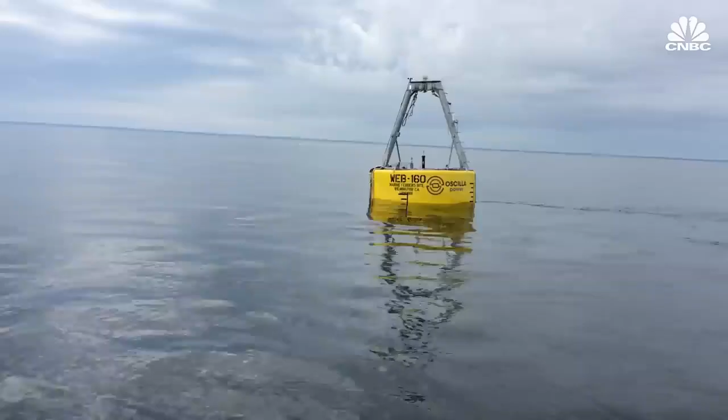Now, though, an influx of federal funding is helping many U.S. companies gear up to test their latest wave energy converters, as the nation's first full-scale, grid-connected test facility for these technologies, called PacWave, is set to come online over the next few years. PacWave really represents for us an opportunity to address one of the most critical barriers to enabling wave energy, and that's getting devices into the open ocean.

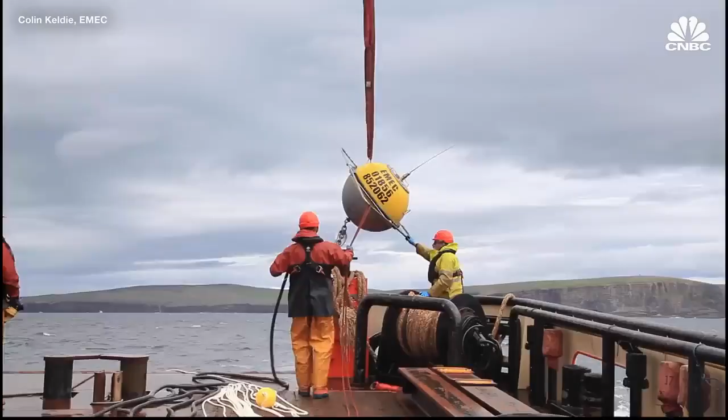That will help the U.S. catch up with its European counterparts, who've been testing wave energy devices off the coast of Scotland since the early 2000s. But while many prototypes have been developed, it's still unclear what technology will prove viable for grid-scale electricity production. There are just this vast array of approaches to turning oscillatory motion into ultimately electrical power.

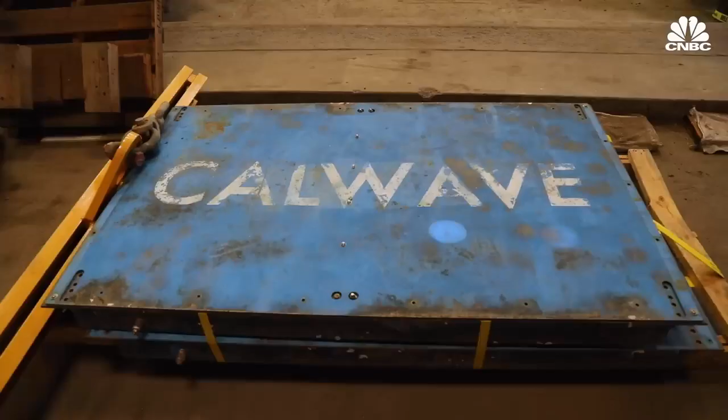We spoke with a number of companies pursuing different technologies and learned how this emergent energy source could help us transition to an all-renewable world, if we can get it to work at scale.

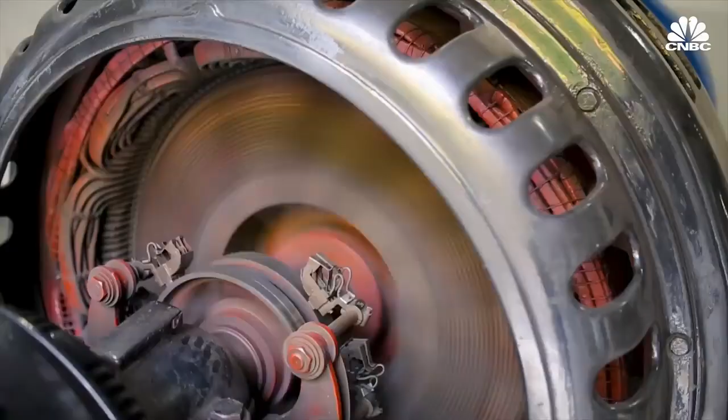Besides the fact that the ocean is a rough environment, the very nature of waves themselves means harnessing their energy is much less straightforward than, say, wind or hydropower. Winds and currents, they go in one direction. It's very easy to spin a turbine or a windmill when you've got linear movement. The waves really aren't linear, they're oscillating.

And so what we have to be able to do is turn this oscillatory energy into some sort of capturable form. There are a number of different ways to do this. But generally speaking, devices work by harnessing the up and down, back and forth, or rotational motion of the waves to drive a generator to create electricity.

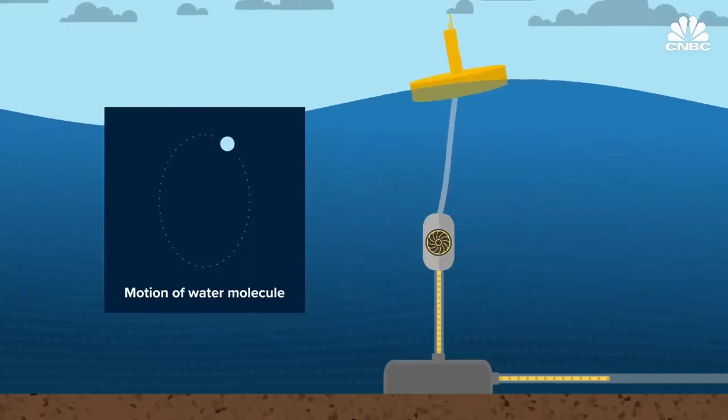Some companies are now attempting to harness energy from multiple different modes of motion. And what we don't really know is which of those is best in a real-world full-scale system. One technology might work really well for large, slow, open ocean swells. Another technology might work really well for choppy or wind wave kinds of energy.

If wave energy proves to be scalable, it has the potential to be an excellent complement to wind and solar, since it can produce energy 24/7 in all weather conditions. And while wind and solar production peak in the spring and summer respectively, waves are more powerful and consistent in the winter. But the infrastructure required to scale up any of these systems and connect them to the power grid is complex and expensive.

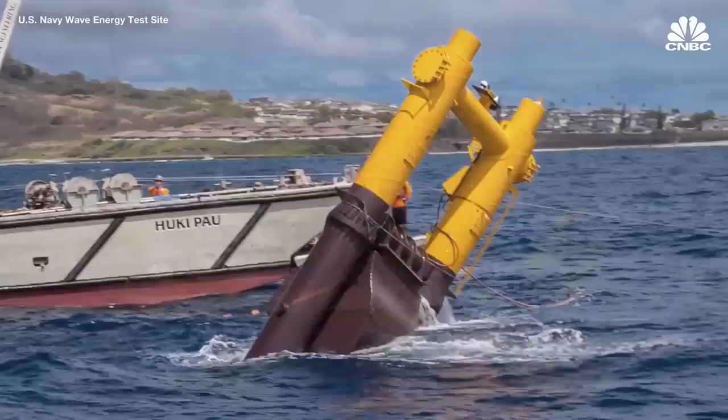So if you're building, let's say, a wave energy plant offshore, you're going to have to build your mooring and anchoring systems out offshore. Cables will then go from your wave energy converter down to a subsea cable where you probably have a sort of a junction box where you might plug 10, 20, 50 devices in with one larger export cable that will then run along the seafloor.

But when it gets close to shore, you'll have to drill it under the seabed and under the surf zone because that's a very active environment, and then pop up in a location on shore.

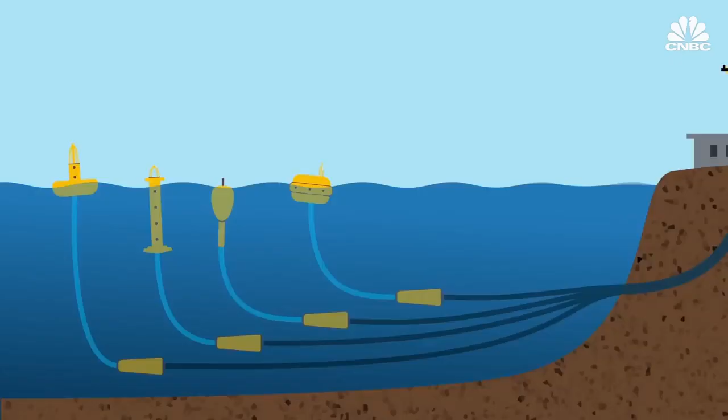PacWave, the Department of Energy-funded wave energy test site off the Oregon coast, is building this infrastructure now. It's a collaborative effort between the DOE, Oregon State University, the National Renewable Energy Lab, the European Marine Energy Center, and a host of other marine energy experts. The facility is fully pre-permitted, so companies can trial their prototypes without concern about regulatory delays.

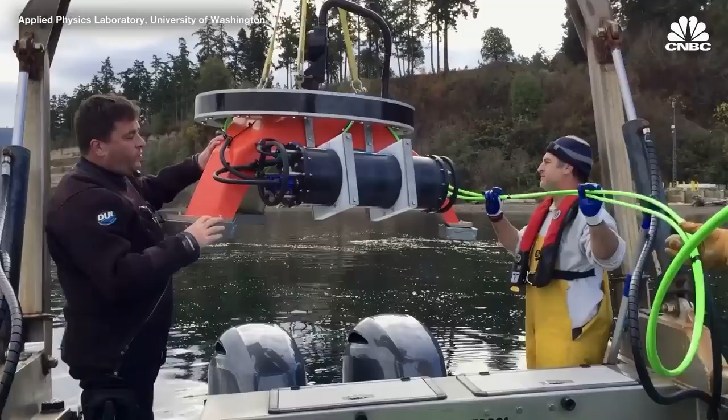The Department of Energy has funded 8 different companies to start deploying at PacWave beginning in 2024, and we can't wait to have them on site. This is really a seismic shift in the wave energy community.

In the U.S., the DOE has been funding marine energy for about a decade, a category which not only includes wave power, but also power generated from currents, tides, and temperature changes. During that period of time, we've spent probably around $500 million or so on marine energy. But this year, we actually saw a record amount for our office, specifically for marine energy, $112 million in 2022. And this also includes an additional $110 million from the Bipartisan Infrastructure Law.

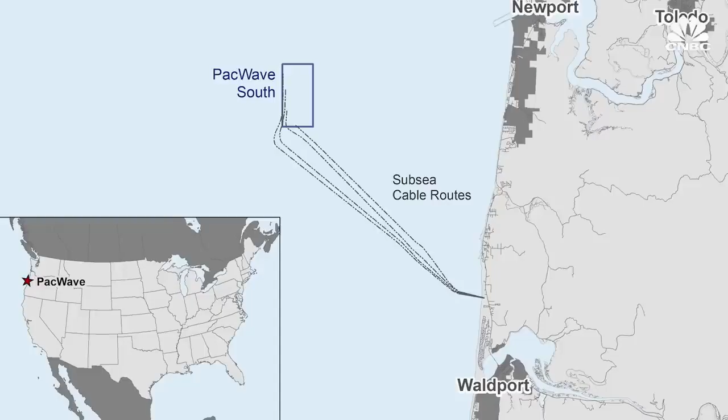And at the beginning of this year, the DOE announced $25 million in funding for 8 wave energy projects, which will comprise the first round of technologies to be tested at the PacWave facility. Of the 8 projects, Bay Area-based CalWave received the largest amount, $7.5 million.

A small-scale version of CalWave's device recently returned after a successful 10-month deployment off the coast of San Diego. Yeah, the device we're testing at PacWave will be a larger version of this, so nearly double the size and 10 times the amount of power. And so this unit specifically was able to power about 30 households. The X800, our megawatt class system, produces enough power to power about 3,000 households.

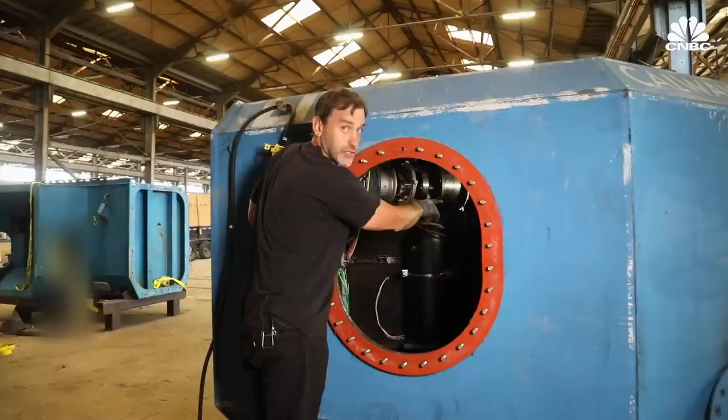So our target is 20-year deployments at sea, and I think that's very achievable with maintenance interventions about every 4 to 5 years. CalWave's tech is classified as a submerged pressure differential device. It operates completely below the surface of the water, and as waves rise and fall, surge forward and backward, and the water moves in a circular motion, the device moves too. Dampers inside the device slow down that motion and convert it into torque, which drives a generator to produce electricity.

Lehmann likens it to how electric cars recharge when braking. As the electric car goes downhill and you put on the brake, it would produce power. And so the waves move the system up and down, and every time it moves down, we can generate power. That oscillating motion we can turn into electricity, just like a wind turbine.

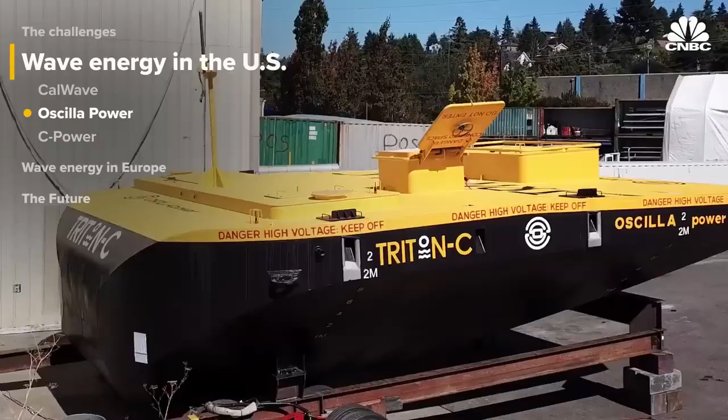Seattle-based Oscilla Power was awarded $1.8 million from the DOE, and is getting ready to deploy its wave energy converter off the coast of Hawaii at the U.S. Navy Wave Energy Test Site. While this facility is smaller than the planned PacWave facility, it's currently the nation's only grid-connected site for tech like this. The system that we're deploying in Hawaii is what we call the Triton-C. This is about a third of the size of our flagship product. It's designed to be 100 kilowatt rated, and it's designed for islands and small communities.

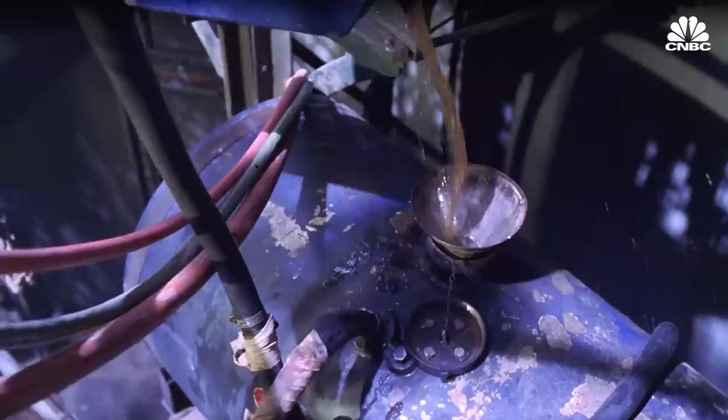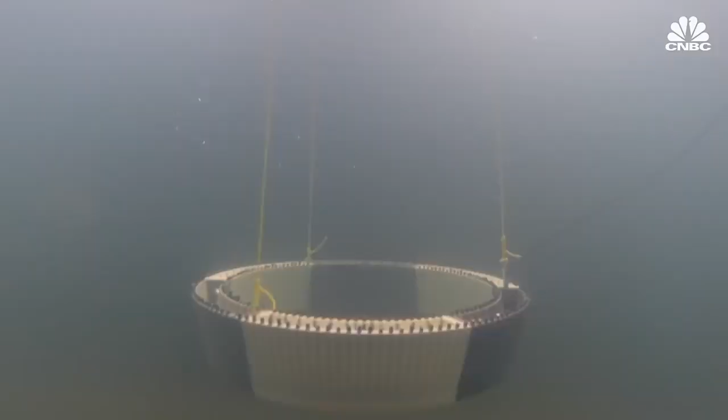Nair and many others are excited by wave energy's potential to generate electricity for remote regions, which rely on expensive and polluting diesel imports to meet their energy needs. Oscilla Power uses a technology known as a two-body point absorber. Part of the Triton-C floats on the surface and moves with the waves in all directions, up and down, side to side, and rotationally. Underneath the float hangs a large ring-shaped structure, which stays relatively steady, thus generating force on the lines that connect it to the float. That force is then used to rotate a gearbox to drive a generator.

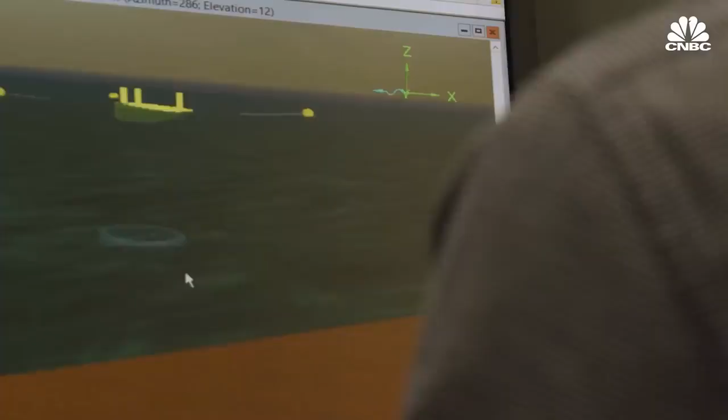So under very weak waves, we get a lot of pitch and roll motion in our system. At very strong waves, we get a lot of surge motion, and in the most prevalent wave climate, we get a lot of heave motion. That's up and down motion. So across all of these, the system certainly moves enough for us to be able to capture energy efficiently across a wide range of climate. Oscilla Power plans to deploy a larger megawatt-scale device in India in 2024, and then move on to testing at PacWave.

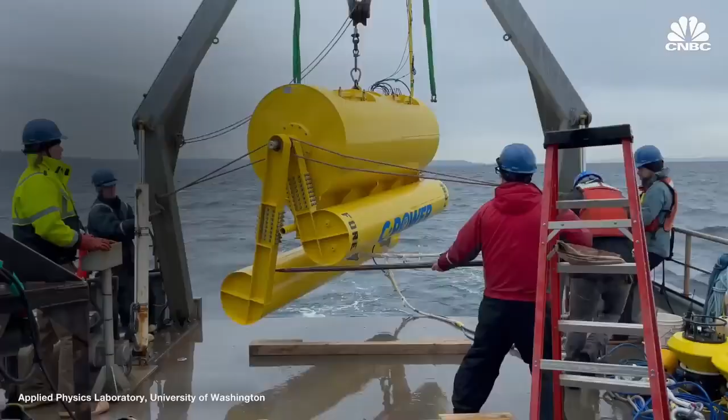The DOE also awarded Charlottesville, Virginia-based company C-Power over $4 million to develop and test its grid-scale wave energy converter, the Stingray, at PacWave. But before that testing takes place, the company is focused on commercializing its smaller-scale system, the Sea-Ray, designed for lower-power applications. Think about sensors in the ocean, research, mid-ocean data gathering, maybe it's monitoring or inspection.

The next step, Lesemann says, is powering ocean robotics and operating equipment. And then you think about diesel genset replacement for island power. Then we start to work our way towards charging networks for autonomous surface vessels, and then eventually to terrestrial to grid applications. The Sea-Ray consists of two floats and a central body, the nacelle, which contains the drivetrain. As waves pass by, the floats bob up and down, rotating about the nacelle and turning their own respective gearboxes, which power the electric generators.

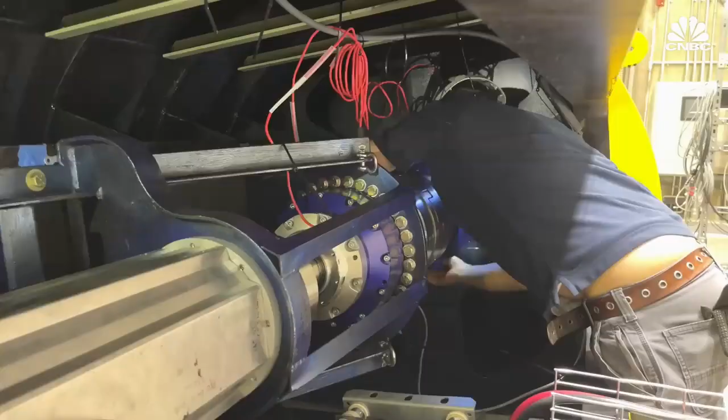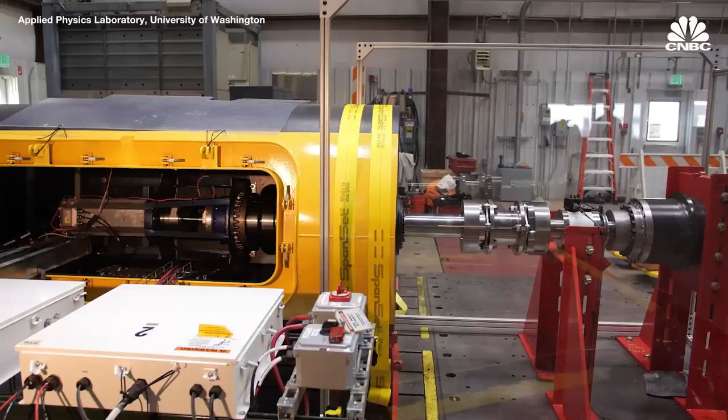We have a Sea-Ray that will be deployed off the coast of Hawaii this fall, and that's a 2 kilowatt version. We've got a number of customers that are involved with us. Saab is one, who's one of the global leaders from a subsea robotics perspective. Biosonics is another with a static data gathering system. After these initial applications, C-Power will work on scaling up its Sea-Ray so that it's compatible with satellite communications and deep water deployments, before building a 200 kilowatt Stingray to test at PacWave.

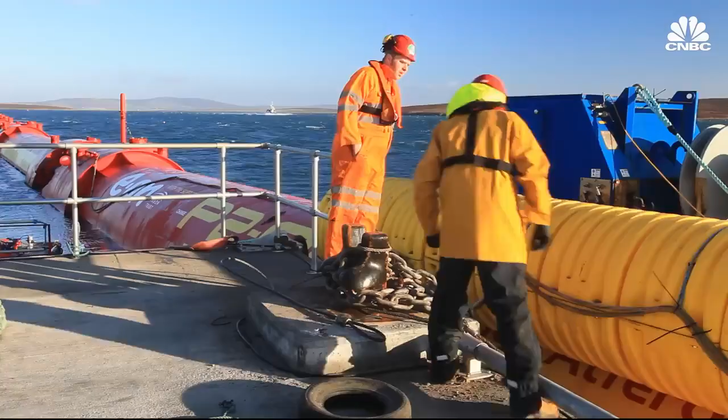The European Marine Energy Center, or EMEC, was the first test site in the world for wave and tidal technologies when it opened in 2003. We've had something like 35 different devices in the water from 22 different companies from, I think, 11 different countries. Some of those include Finnish company Wello Oy, which produced power for the grid in Scotland during its 2 deployments at EMEC, and has subsequently been deployed in Spain, and Scottish company Pelamis, which became the first offshore wave energy converter to produce power for a national grid in 2004. It was also the first to be purchased by a utility company, though financial troubles ultimately forced the company to cease operations.

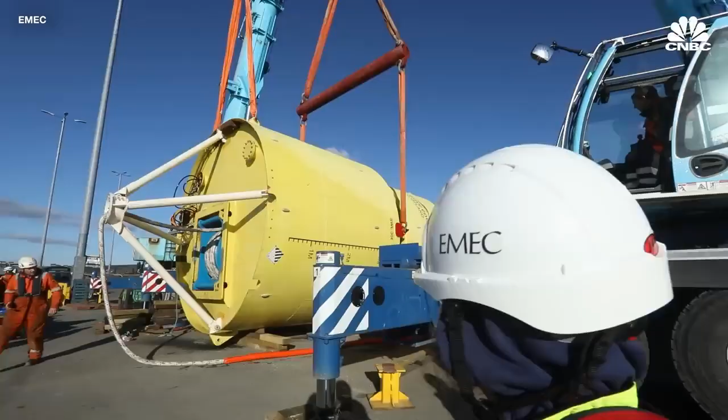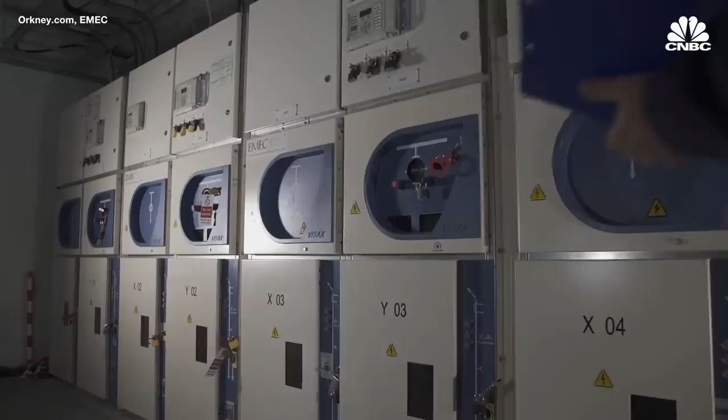While EMEC has seen its share of successes and disappointments, no company has yet commercialized a grid-scale wave energy converter, so Kermode is more than happy to see more players and more testing facilities popping up. We firmly believe that this is an international endeavour, and we're not going to win this just because some people on a small Scottish island managed to crack this. This will be dealt with because the scientific and technical community has really put its shoulder to this and found a way to make it work.

But while PacWave and EMEC are focusing on testing offshore devices, one Swedish company, EcoWave Power, thinks it will be quite a while before these complex devices can reliably produce power. I would like to see more companies focusing on easier projects that will give the population, the investors, the government, the safety to say, okay, now it's safe to legislate, now it's safe to invest, now it's safe to believe in wave energy. That's why EcoWave Power is installing onshore devices on breakwaters, piers, and jetties.

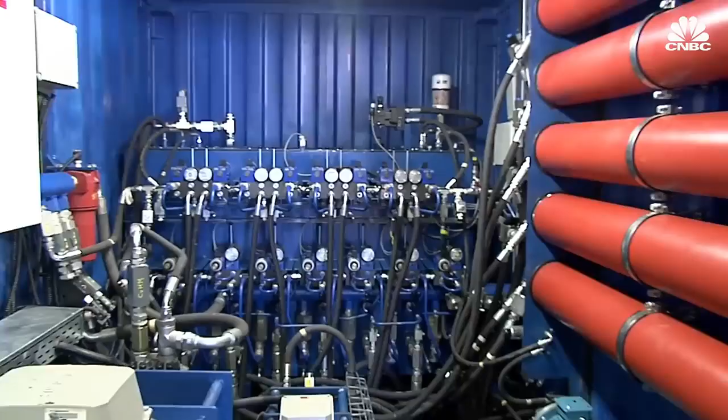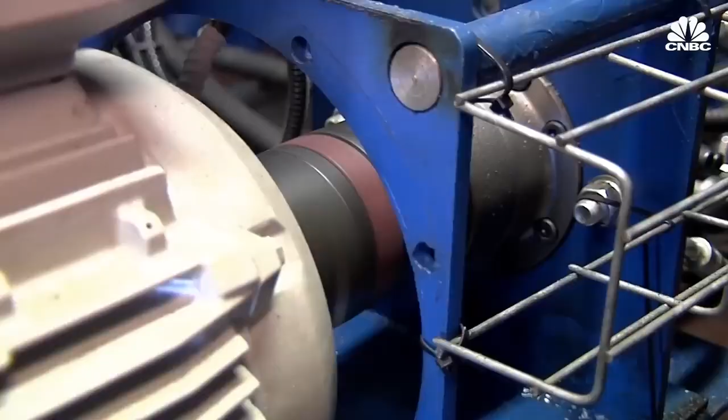The only thing in our technology that is in the water are the floaters, which belong in the water. All the expensive conversion machinery is on land, just like a regular power station. So basically, this enables a very low installation, operation, and maintenance cost. As a floater moves up and down with the motion of the waves, it drives a hydraulic piston, which compresses fluid that's then stored in an accumulator. When the fluid is released, it turns a hydraulic motor, which powers an electric generator.

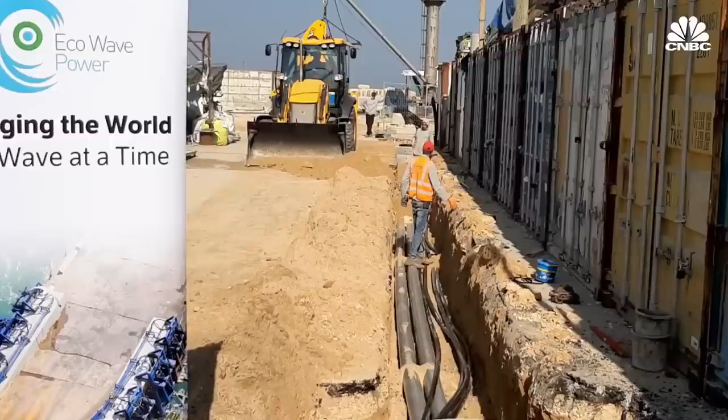While nearshore and onshore waves aren't as powerful as offshore waves, Braverman says that current technologies aren't able to fully take advantage of that extra energy potential, meaning the energy produced from her company's floaters is on par with the offshore competition. Eco Wave Power produced power for the grid in Gibraltar for 6 years, powering around 100 homes with its 100 kilowatt system when operating at peak efficiency. The company is finalizing another 100 kilowatt grid-connected station in Israel and has signed an agreement to install its devices at the Port of Los Angeles, starting with a 100 kilowatt installation and hoping to scale to 15 megawatts, which could power about 15,000 homes.

There are still many unknowns when it comes to wave energy tech, including whether costs can fall enough to become competitive with fossil fuels. In order for marine energy to be competitive, we need to be at cost parity with solar and wind or offshore wind. So really driving at that less than 6 cents a kilowatt hour. But that's a long way away. The projections for the levelized cost of energy for the wave energy devices are 60 cents, 80 cents, $1 per kilowatt hour. Wave energy has really struggled to get solid deployment at the moment, mainly, to be brutally honest, because hydrocarbons have been so cheap.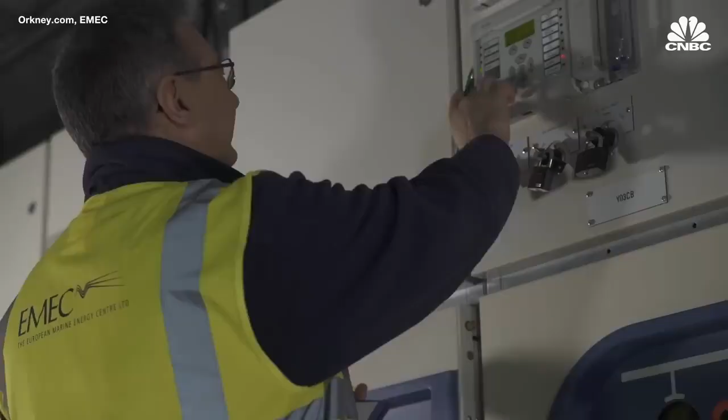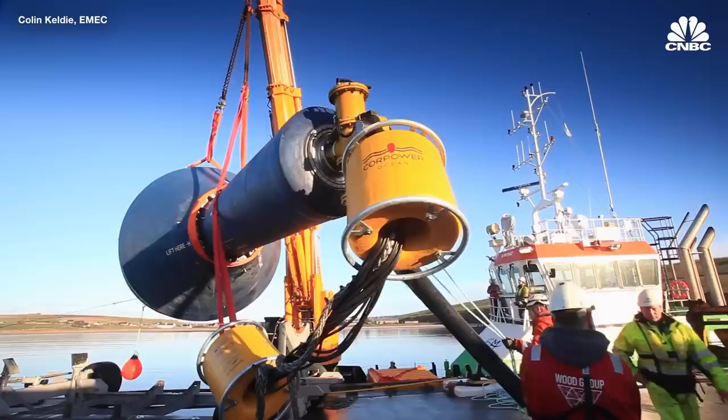And while there are ongoing efforts by the DOE and the companies themselves to monitor the impact of their devices on marine ecosystems, it will take time to get a full picture of the impact. Really, this is going to have to be something that we learn as we put systems into the water. But we're funding environmental monitoring, funding work to really understand the interaction of species with deployed systems, and we take this very seriously.

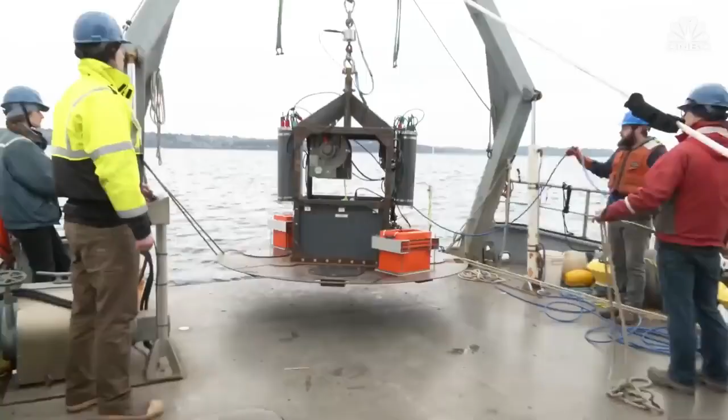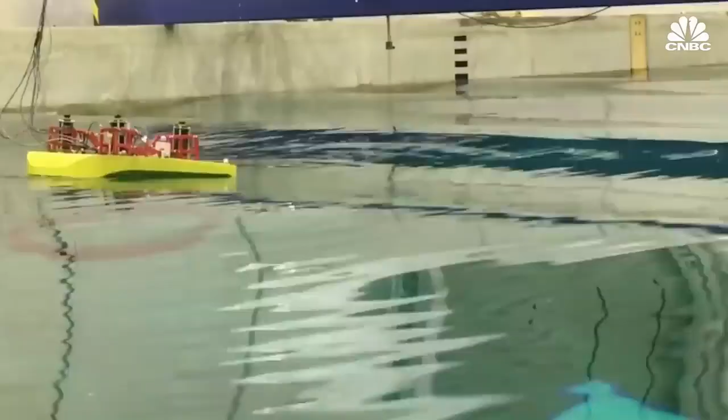Questions about potential environmental impacts could delay the permitting process as companies move beyond testing and attempt to commercialize. One thing that could make permitting easier, though, is if there's convergence around a particular design principle. There are different applications that require somewhat different approaches, but I think for the mainstream, you will see some form factor convergence. Right now, though, it's far from clear what technology will rise to the top for grid-scale electricity generation. But in the meantime, experts say that there are many exciting low-power opportunities. Data gathering, subsea robotics, operating equipment, that's today. That's ready to go today.

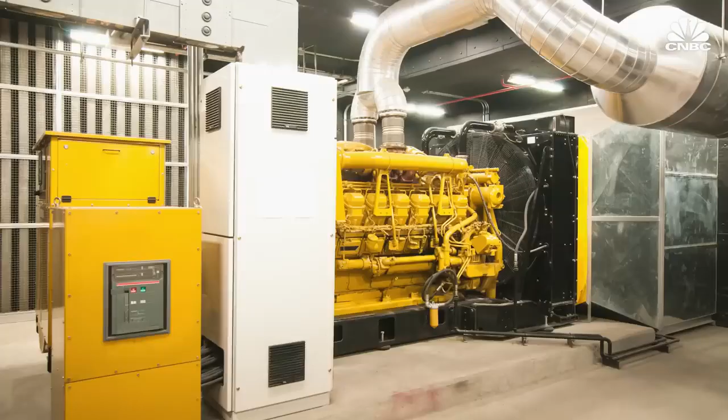Next, many point to places in the Arctic, like Kodiak Island in Alaska, as potential early adopters of the tech, since there's so little solar power there in the winter, and the community relies on expensive diesel generators for power. Estimates vary for how long it will take before we see wave farms providing power to the mainland, but most agree that it won't be this decade. So we have a goal of setting about 1 gigawatt of power by 2035. And we really see that as the first opportunity for wave energy to come online to serve the nation's grid.

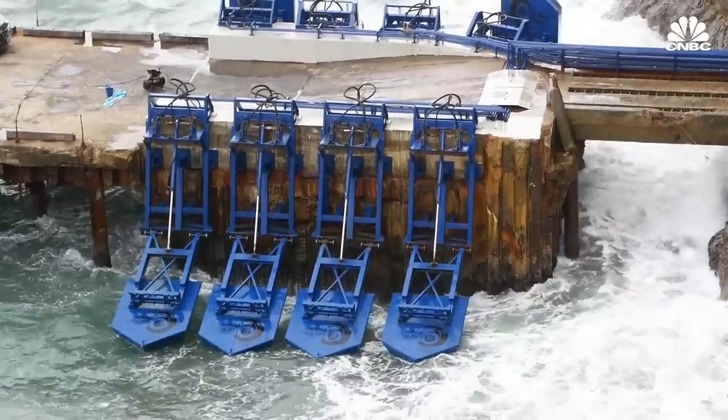Scale-up will largely depend upon continued government support in the U.S. and abroad. The recent passage of the Inflation Reduction Act, which includes $369 billion earmarked for clean energy and climate change mitigation, has many optimistic. But Kermode says that globally, we need to be even more aggressive about getting these devices in the water. It does take time to do this. The question is, do we have time? And so do we need to get at this harder than we are at the moment? And I would suggest we really, really do need to be quite aggressive in what we're doing and really push hard.